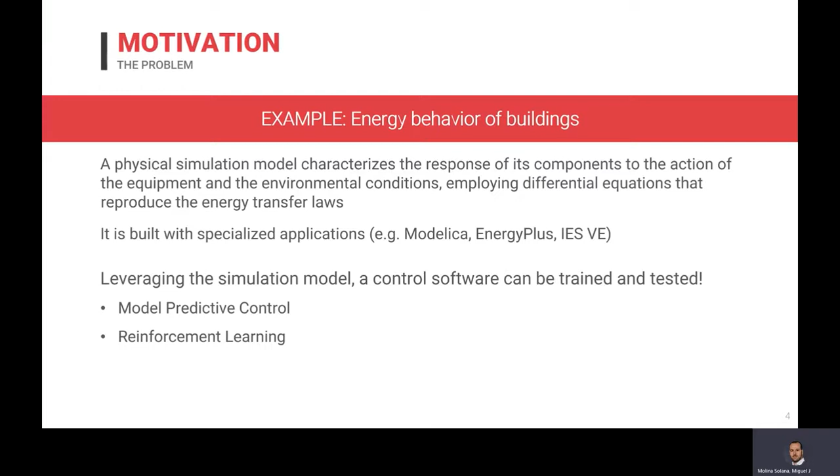The good news is that if we can have a simulation model of a building, we can actually use it to test many what-if scenarios and learn from them, checking how much energy is spent and how the comfort is maintained. Two approaches have been used for that learning. First one, model predictive control, which is the classical one, and reinforcement learning, which has gained great traction in the last decade. Without further ado, let's briefly touch on both of them.

Model predictive control requires a simulation model against which to test different actions. It allows us to create longer-term operation plans, not limited to just reactive actions, but adding sort of a plan. The issue with model predictive control is that it is a combinatorial optimization problem. We choose a low complexity model, we limit the number of variables involved, which is good in terms of efficiency, but reduces the capability of the control and the possible interactions, sometimes becoming a very simplistic view of the reality.

However, if we opt for a full complexity model with more variables and interactions, we can achieve higher accuracy and more interpretability, as it is more alike the real building. However, the cost is that we lose efficiency, making in some cases unfeasible to run very detailed simulations.

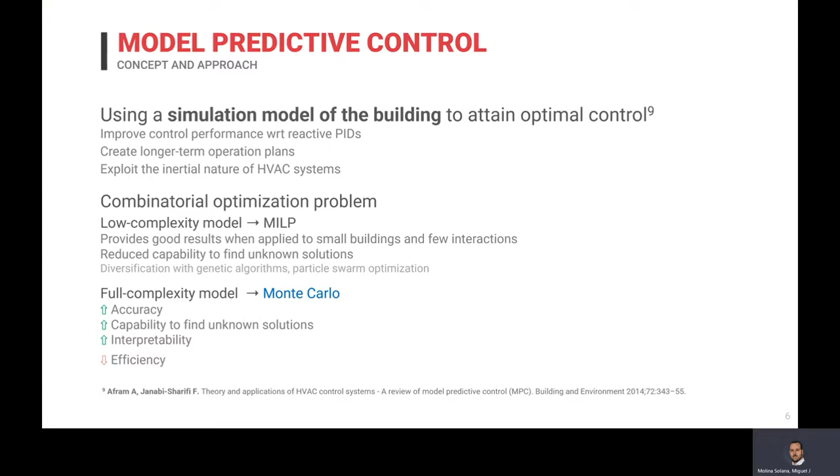We actually tried the model predictive control approach in this European project, Energy in Time, which finished in 2017. We developed full complexity models that were able to achieve energy savings of around 20% on average, reaching in some scenarios 40%. In the following slides, there are some results extracted from one of the papers that we published, which is referenced here. I'm not going to spend time on these slides, but you can check the paper if you want.

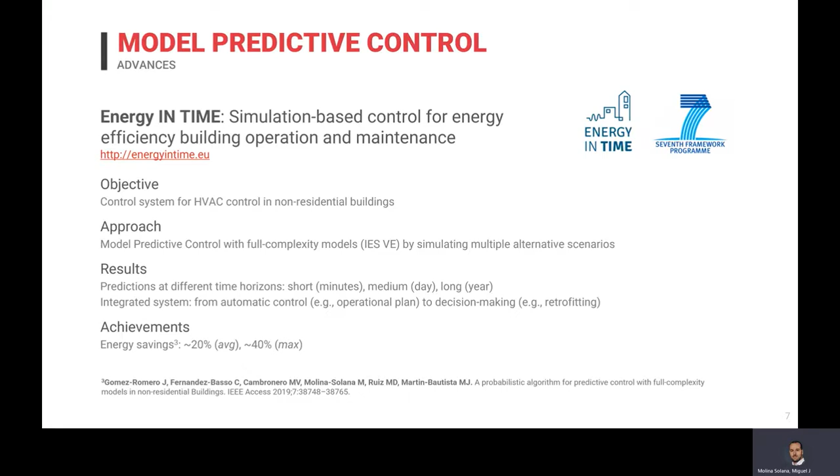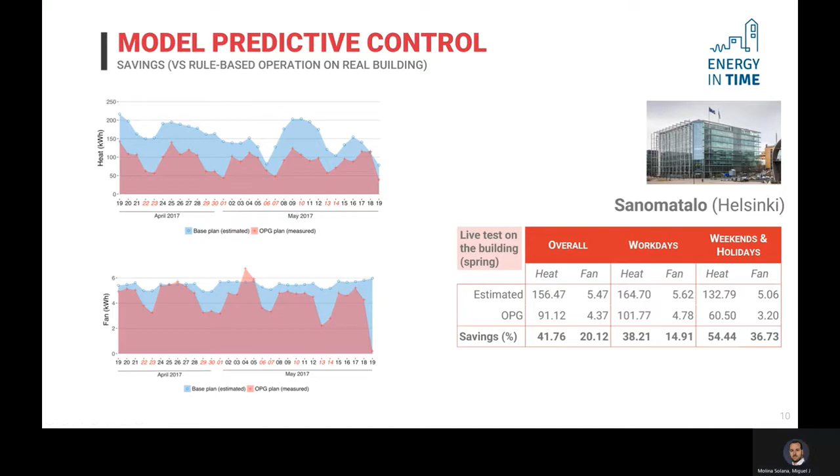All in all, the model predictive control approach has its limitations. The main one is that it depends on the creation and running of a simulation model, which is often non-trivial and very time-consuming. Because we often tend to overcome this by relying on low complexity models, the ability of testing alternatives and propose new strategies is often limited, as is dealing with evolving conditions.

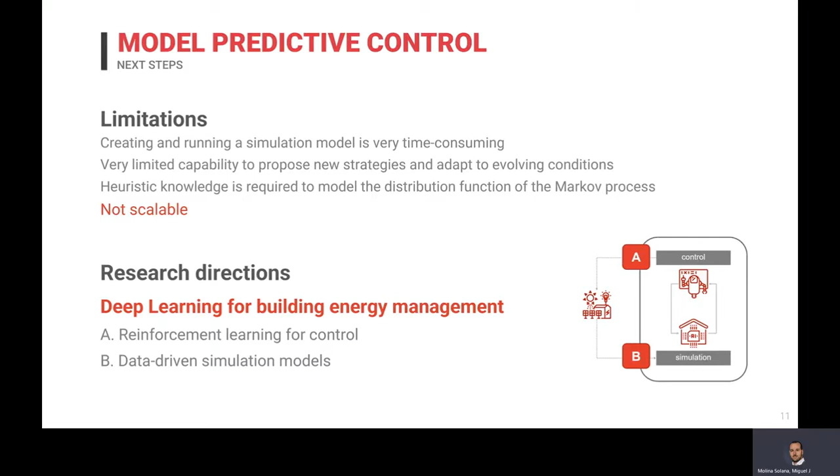In the literature, some alternative solutions have been offered, and of particular interest are those based on deep learning. In our group, we're actually embracing two of them that can go together. The first one is to replace classic model predictive control with deep reinforcement learning. And the second one is using data-driven simulation models, for which you have more details in our paper in the conference.

Reinforcement learning has seen a great interest in the last decade due to its coupling with deep learning, leading to what we know as deep reinforcement learning. It has been used in many different problems, with some of the most known being the Atari games or the AlphaGo game. The basic setup in a reinforcement learning problem involves having an agent that interacts with an environment.

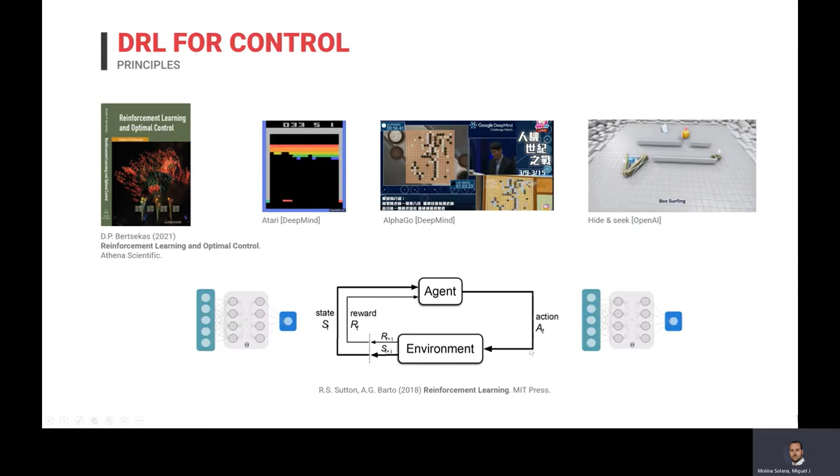And after each interaction, the agent gets some rewards for its actions and some observations about the new state of the environment. This is actually in a loop. So the agent then in the next iteration chooses another action, receives another reward, gets some observations, and so on and so forth. We can actually add deep learning to this framework, for instance, with networks for estimating the reward or to select the next action.

The way to formalize these problems is as follows. Basically, the goal is to minimize energy while maintaining temperature or any other metric within a desired range by applying a sequence of set points to the equipment. So in this case, the state is time, temperature, and any other sensors. The action that the agent takes is a combination of different set points, and the reward, in the case of buildings, is actually a weighted combination of two things.

The first one is the cost of the energy that is necessary to run the equipment, and the second part of the reward is actually a penalty for violating comfort. We assume that the environment is a simulation model of the building.

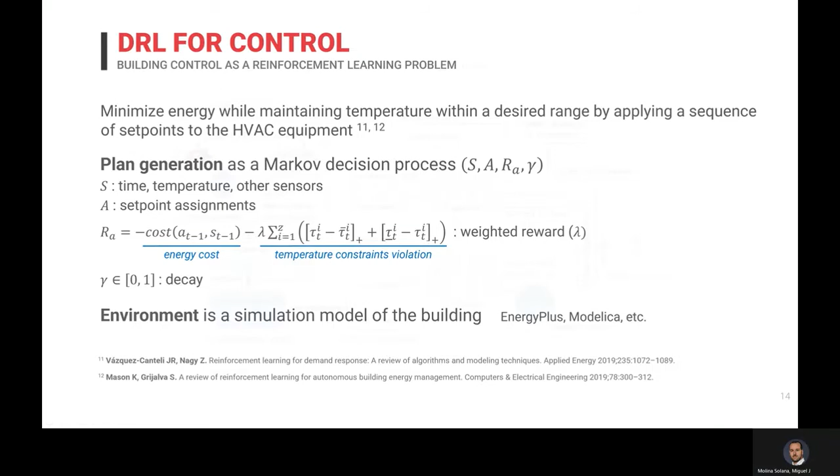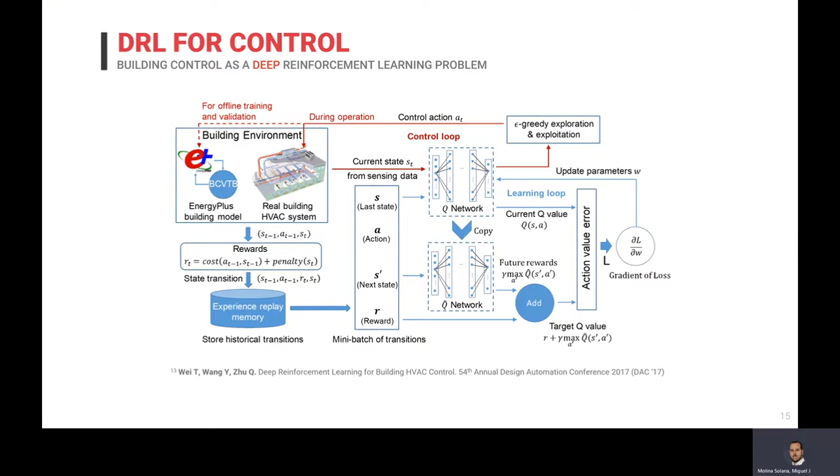In this slide, you can see the general framework of a building control problem, as was published by Wei et al. Basically, what these guys did was take the original Atari paper and translate it to the domain of building energy control.

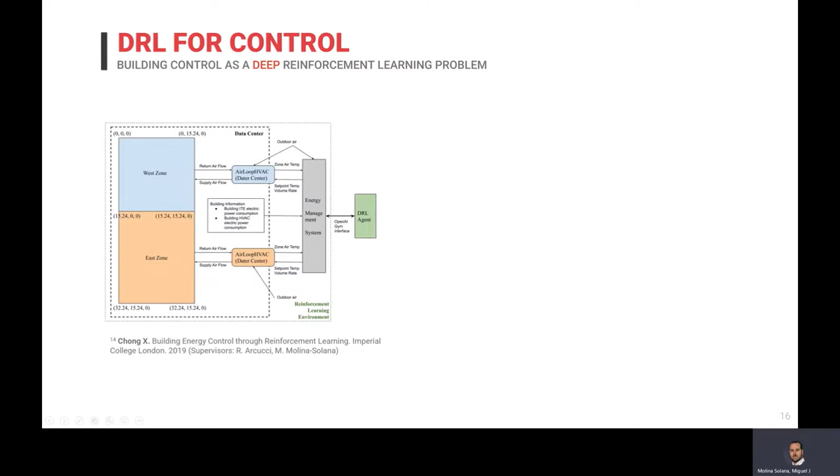One of our MSc students at Imperial College also proposed and implemented her own deep reinforcement learning architecture for this problem, the reference here. But all in all, the point is that for learning, in this deep reinforcement learning scenario, there are several approaches, more or less complex, that take into account several things or aim at optimizing particular parts of the process.

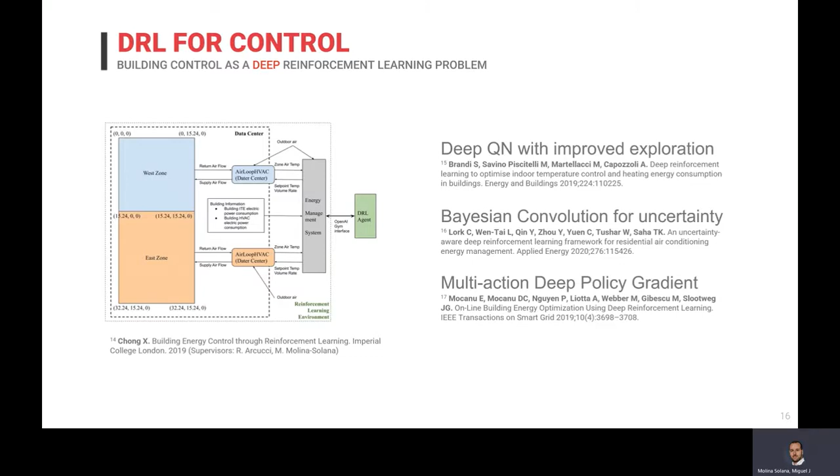However, there are currently several challenges that remain open and need to be tackled. The first one is that there is currently no such OpenAI gym for energy control. In other words, there is no common environment and API to run deep reinforcement learning for building energy control on it. Second, there is a lack of common scenarios and benchmarks to compare performance of different algorithms, some sort of ImageNet for this domain.

In our research group, we are currently addressing these two issues by creating Energym, which is a Python package that acts as a Gym environment for building energy control and also provides several examples and benchmarks so you can compete against it. There are also additional issues that came from real-world control problems that, of course, need to be tackled. And among them, we can cite the limitation of training data, the presence of operational constraints, and particularly the last one, which is the lack of cheap and fast simulation models, which is our next point in the presentation.

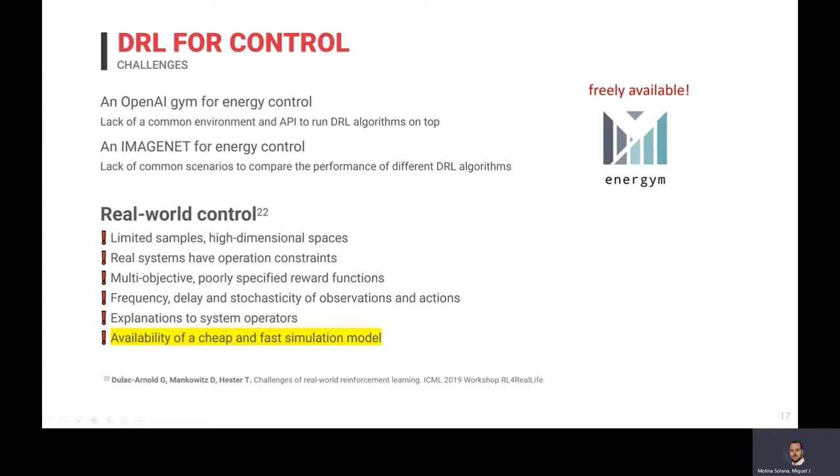So the basic question would be, can we represent a simulation model of a building as a neural network? So let's go to it. Firstly, I would like to say that neural networks have indeed been used to predict energy consumption. And this is a classic example. So the inputs for the network would be observations coming from sensors, then you have the network, and the output is the estimated consumption at the next timestamp.

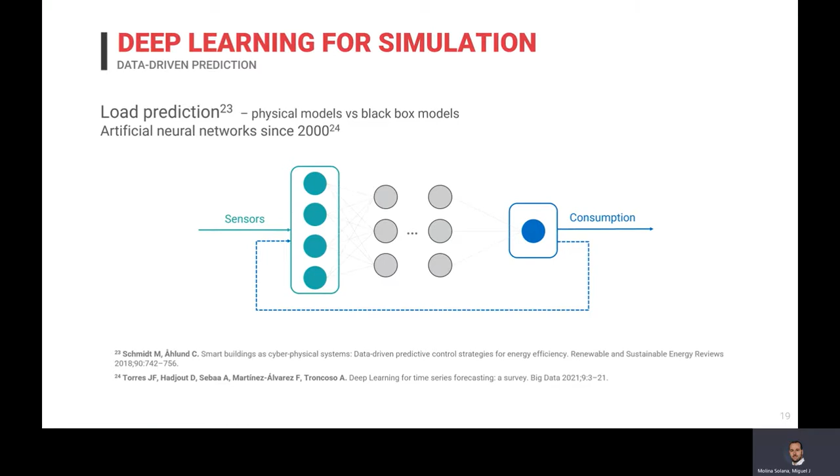So from that architecture, a simulation model is actually an extension of it. As inputs, we have sensors, and also we have actuators. And as outputs, we have the consumption as before, but also if we have observations, so sensor readings at the next timestamp, then we actually have here what would be a simulation of the building.

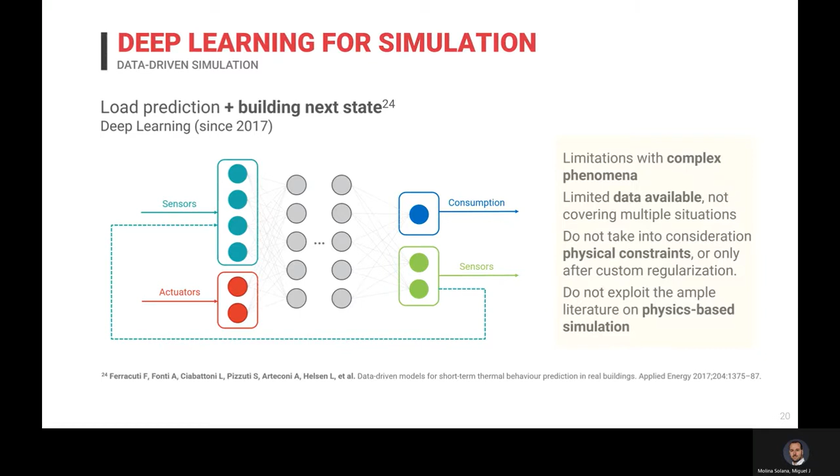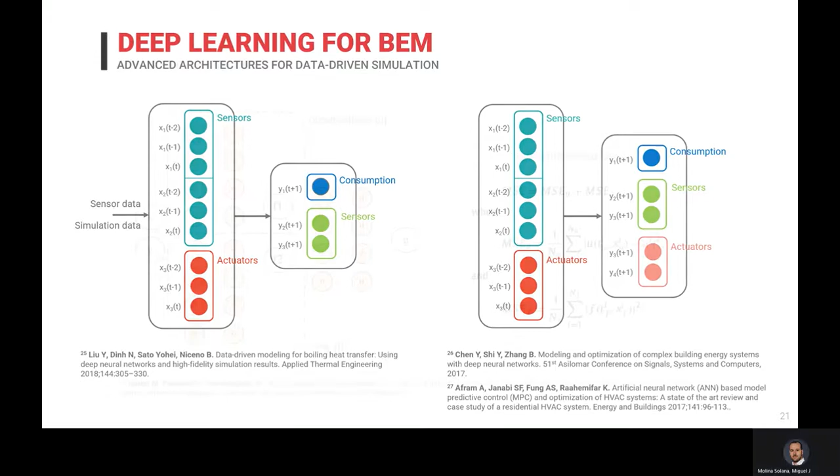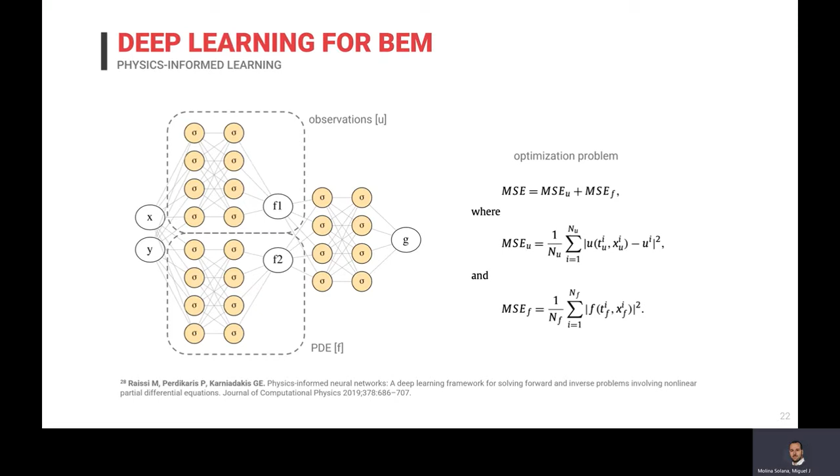An additional issue is that these architectures do not take advantage of the underlying physics. So it would be a good idea to add this knowledge of physics and the constraints and restrictions to the network. And that's precisely what SciANN and SimNet, which are actually frameworks not related with building energy control, but deep learning in general, aim to do. They aim to include physics-informed learning in the learning of the neural network. However, they are still work in progress because right now they're only based on fully connected networks. So recurrent neural networks, LSTMs, and other architectures cannot yet be integrated with them.

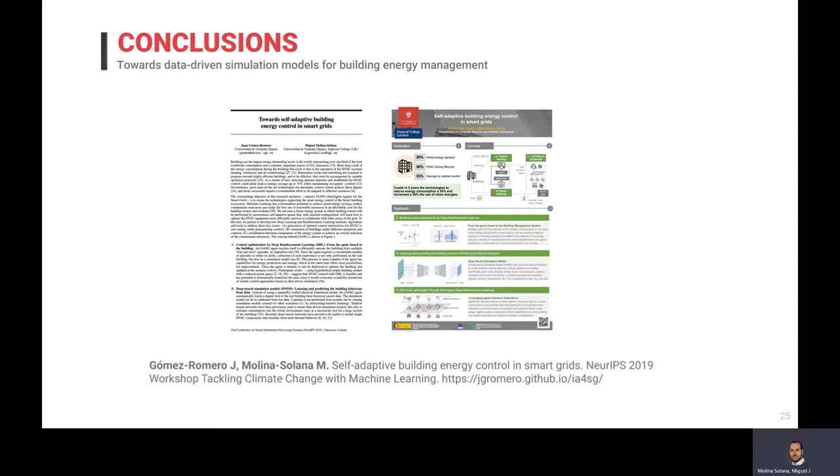As a conclusion, what we are aiming for is something that we presented in our 2019 NeurIPS poster, which is namely to add deep learning to this framework in both the control, A, and also in the simulations, B. If we have simulations that run quickly and cheaply, which is something that can be achieved with deep learning, then we can run many simulations, which is actually good for having an effective reinforcement learning process, because we can try and test many times in different conditions using different actions and actually get a more optimized plan.

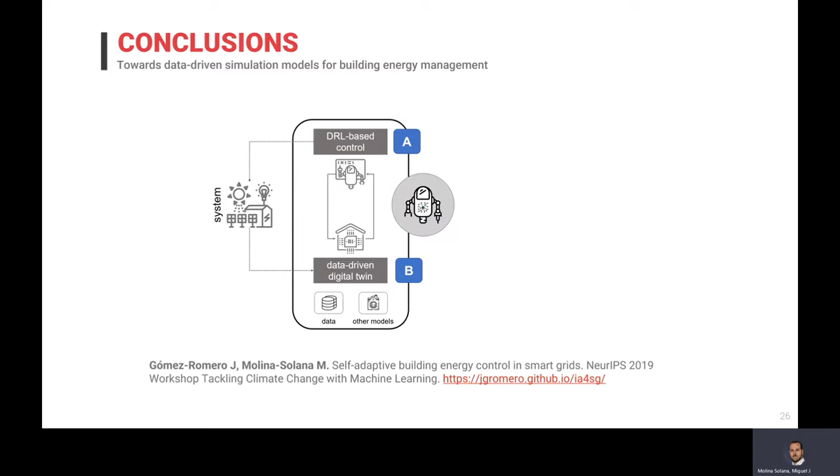However, of course, there are further lines of research to overcome some problems, but also to optimize the learning in particular scenarios. Regarding A, the control part, the main problem to solve is to learn effectively with a limited number of examples. And those examples might not cover all the different scenarios. Imagine you have a building and you have historical data; it's very possible that in your historical data, you haven't had a strange day in terms of weather or some unexpected circumstances. So you don't have an example to actually learn from if that's the case.

Regarding B, which is the simulation, and having this simulation model, problems come from not having enough data, again, but also from being able to encode the physics information and the physics constraints. So actually, that the temperature can only be in a particular range, or that there cannot be sudden changes in the temperature, and many other things. It's something that neural networks per se cannot take into account. So we need to add that information somehow.